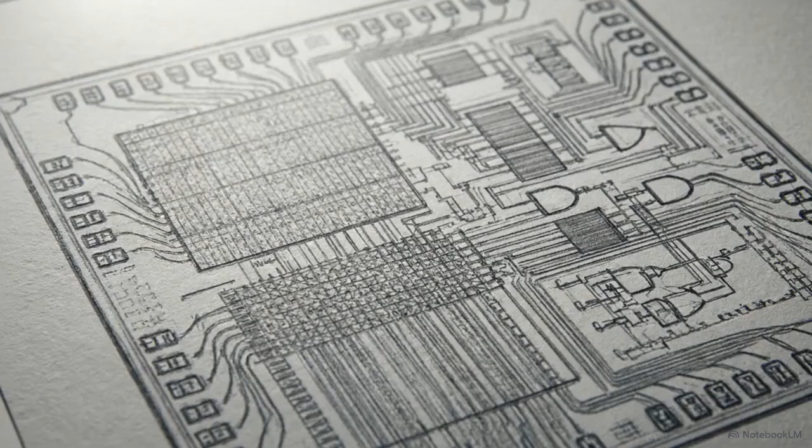Inside modern hardware, data moves at staggering speeds. Trillions of operations cycle through silicon pathways every second. But raw speed hits physical walls, bringing that momentum to a dead stop.

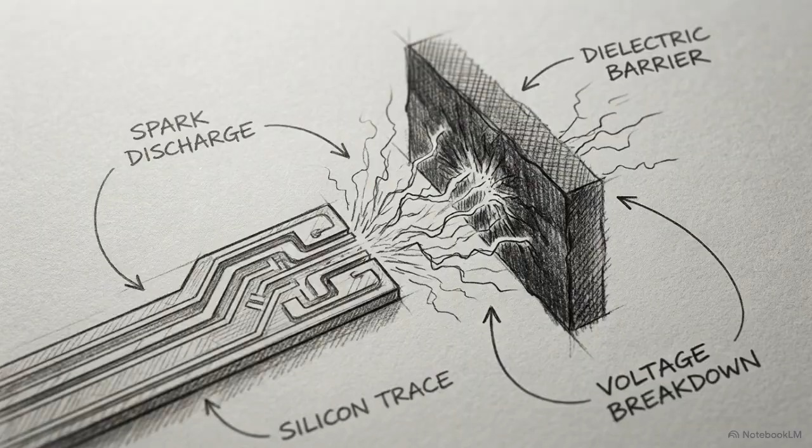In distributed computing clusters, processors have disjoint address spaces. They communicate by sending messages over a network bus. When thousands of nodes try to share data simultaneously, that bus chokes under the communication overhead.

Inside a single processor core, very long instruction word pipelines try to execute multiple operations per clock cycle. But if one instruction depends on the result of another, the pipeline stalls, wasting valuable clock cycles on empty dependencies.

Then there are SIMD vector registers, designed to process contiguous blocks of memory all at once. If that data isn't perfectly aligned to the strict physical boundaries of the hardware, the entire operation faults.

Finally, there is memory latency. A CPU cache sits completely idle, starving for data to arrive from main memory, because the physical distance simply takes too long to traverse. To a systems programmer, network routing, instruction scheduling, memory alignment, and cache latency each demands its own specialized toolset and optimization strategy.

But an optimizing compiler does not see the physical wires. It does not see the network, the registers, or the silicon cache. To the compiler, these four separate physical bottlenecks are the exact same mathematical problem. They are all resolved by a single framework, the Affine Access Function.

This equation translates the execution of loops and array references into a multidimensional geometric space. An array access is considered affine if its index is a linear combination of the surrounding loop variables. It maps a specific point in an n-dimensional iteration space directly to a specific memory location in the data space.

This theory was originally developed to parallelize code for shared memory symmetric multiprocessors. Today, it acts as a universal engine, calculating the exact spatial and temporal coordinates needed to optimize distributed clusters, instruction pipelines, vector units, and prefetch controllers alike.

Consider a message-passing distributed cluster or a non-uniform memory access architecture. These machines connect independent processors, each with its own local memory, across a larger network. If every processor attempts to share all of its data constantly, the sheer volume of traffic overwhelms the interconnect bus. The communication cost quickly exceeds the benefit of computing in parallel.

The compiler must prevent this traffic jam. Its goal is to carve out large, mathematically independent blocks of computation and assign them to specific processor IDs, minimizing the need for network communication. It does this by using affine partitions.

The compiler takes the entire multidimensional iteration space of a program and mathematically slices it, mapping distinct iterations to separate physical processors. To figure out which data each partition needs, the compiler uses a technique called projection. It takes the mathematical loop limits and projects them directly onto the array access function. This calculation pinpoints the isolated subsection of an array that a single processor will touch.

Every processor receives only the bounds of the data it explicitly requires. Where those data requirements overlap between processors, the compiler automatically generates explicit send and receive instructions at the exact boundaries of the partitions. Unnecessary network traffic is now completely eliminated.

That alone solves the macro-scale routing problem, but the exact same math applies when we zoom in to the microscopic scale of a single execution core. Modern execution cores, like the Intel Itanium 2, utilize very long instruction word and superscalar architectures. These processors issue multiple operations simultaneously within a single clock cycle.

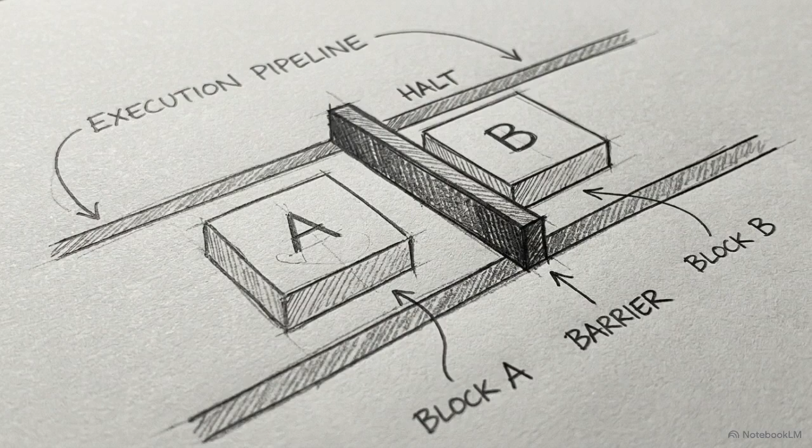Their performance is strictly limited by data-dependent cycles. If instruction B requires the output of instruction A, B must wait.

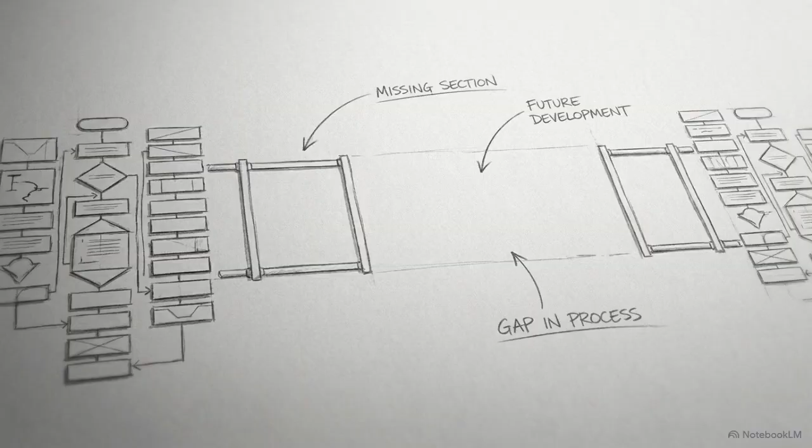This delay creates an execution bubble, an empty gap where the hardware does absolutely nothing. To eliminate these bubbles, the compiler applies loop permutation, swapping the axes of the iteration space. This pushes independent iterations into the innermost loop, shattering precedence cycles. The compiler continuously feeds the VLIW pipeline, leaving no empty cycles.

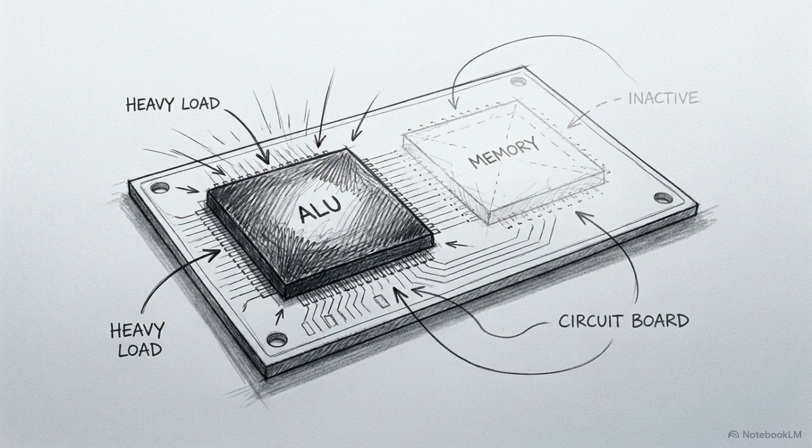Even without dependencies, a pipeline can stall if resource usage is unbalanced. That is where another affine primitive comes in, loop fusion. If one loop heavily taxes the arithmetic logic unit, and another loop only performs memory loads, the compiler fuses their mathematical domains together. Now, the processor uses its computational units and its memory units simultaneously, maximizing hardware utilization.

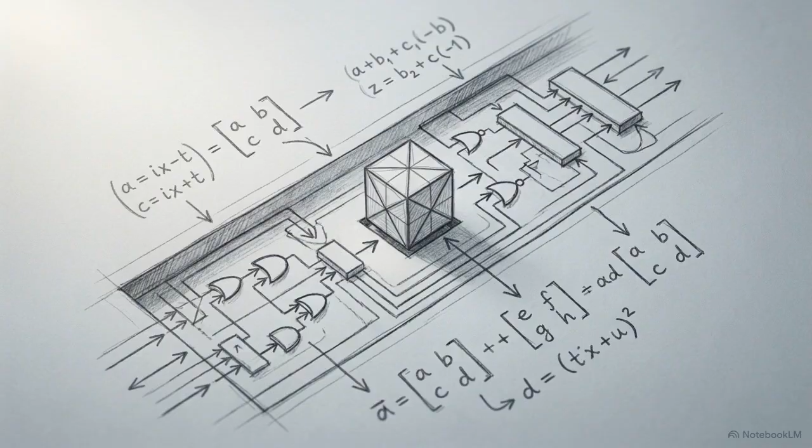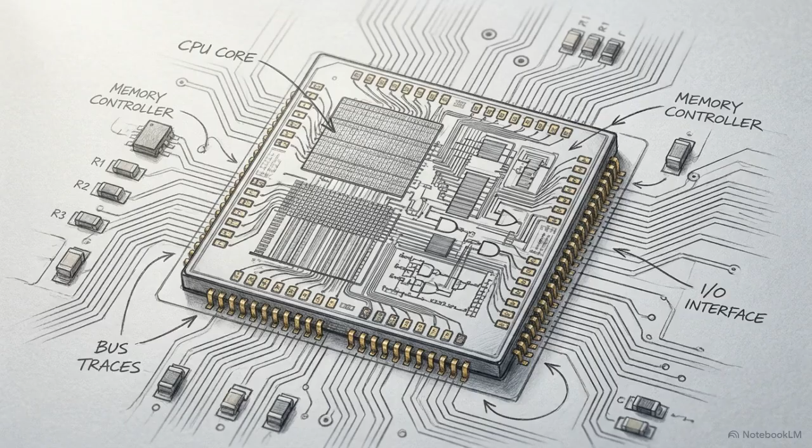Routing data packets across 1,000 separate nodes, or scheduling instructions in a nanosecond pipeline, two vastly different physical realities, governed entirely by reshaping the geometry of the iteration space. This geometric approach also solves the physical constraints of data alignment. In early supercomputers, vector instructions fetched data serially, overlapping computations on massive specialized hardware. Today, that architecture has been miniaturized.

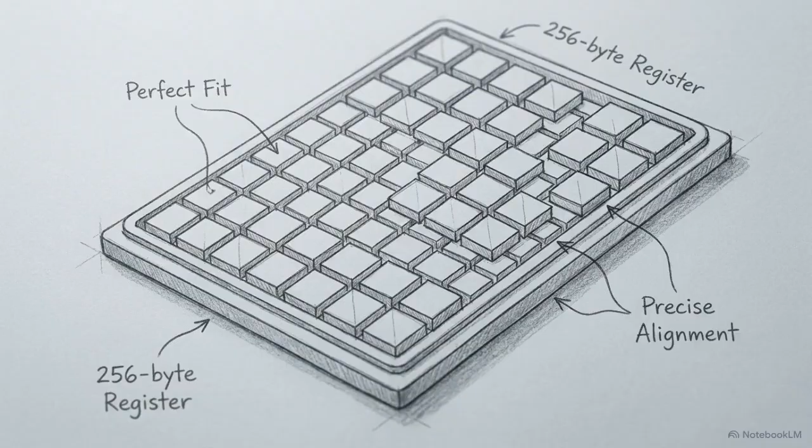High-performance microprocessors use specialized SIMD registers to apply those same vector concepts directly at the chip level. SIMD stands for Single Instruction, Multiple Data. It allows a processor to issue one instruction and simultaneously apply it to a wide, contiguous swath of memory locations. But this hardware is physically rigid. It requires perfect alignment in memory. If misaligned, the instruction simply fails.

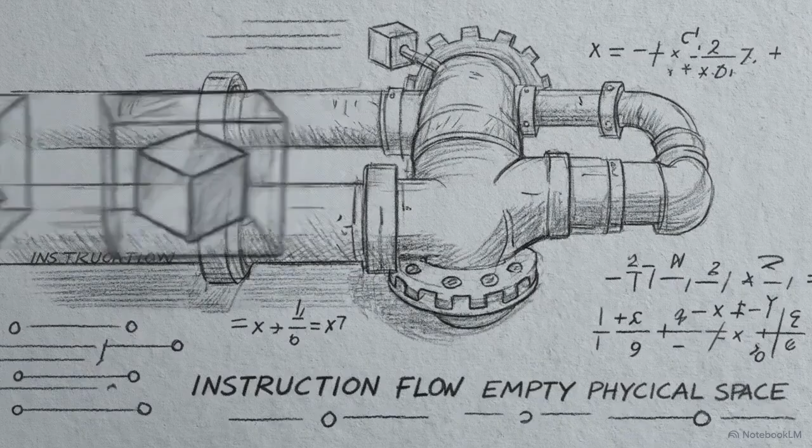The compiler enforces this alignment using strip mining, segmenting the iteration space into blocks that match the SIMD register's exact width. For unaligned edge elements, it creates a specialized prologue and epilogue loop, allowing the main loop to execute safely on perfectly aligned blocks. With the vectors aligned and the pipeline fed, the processor faces its final and most severe physical bottleneck, memory latency. No data locality optimization can eliminate all memory accesses.

When a processor requests data not in its local cache, it suffers a cache miss. The processor halts completely, wasting hundreds of cycles waiting for data from main memory. Processors have prefetch instructions to load data in advance, but guessing is a very dangerous game. Fetching data too early displaces critical information already residing in the cache, causing even more delays.

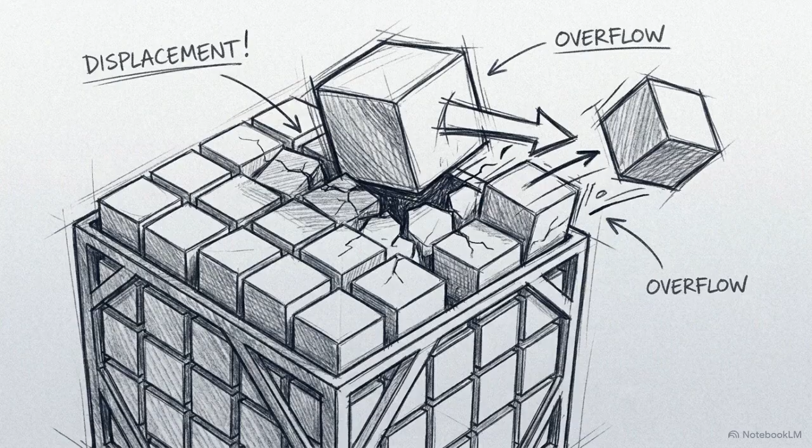To hide this latency, the compiler relies on affine reuse analysis. It acts as a mathematical crystal ball. By analyzing the null space of the access matrix, the compiler maps the exact temporal and spatial coordinates of the data. It calculates the precise iteration where a cache miss is guaranteed to occur. Knowing the future, the compiler uses software pipelining to schedule prefetching with perfect timing. While executing iteration I, it dispatches a request for iteration I+6. The fetched data drops into the cache exactly when requested, completely hiding the latency.

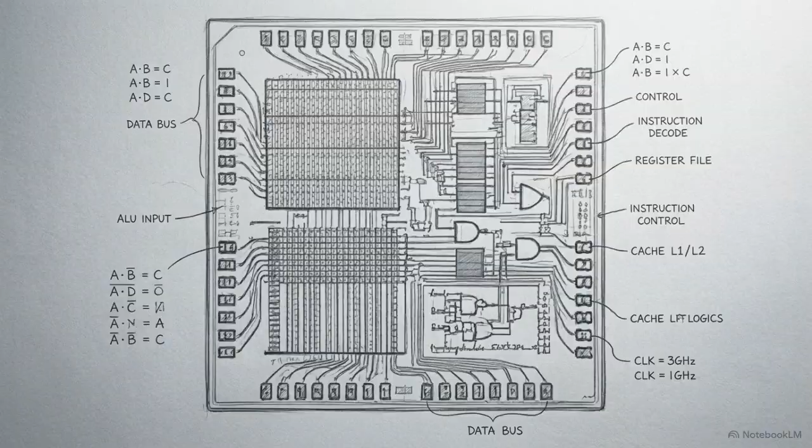By utilizing affine transformations, the compiler manipulates space for SIMD alignment and orchestrates time for cache prefetching, ensuring the hardware is constantly fed. We've looked at networked server nodes, at VLIW pipelines, wide SIMD registers, and physical cache latency. Yet the optimizing compiler is entirely blind to these physical constructs. It knows nothing of wires, buses, or silicon structures.

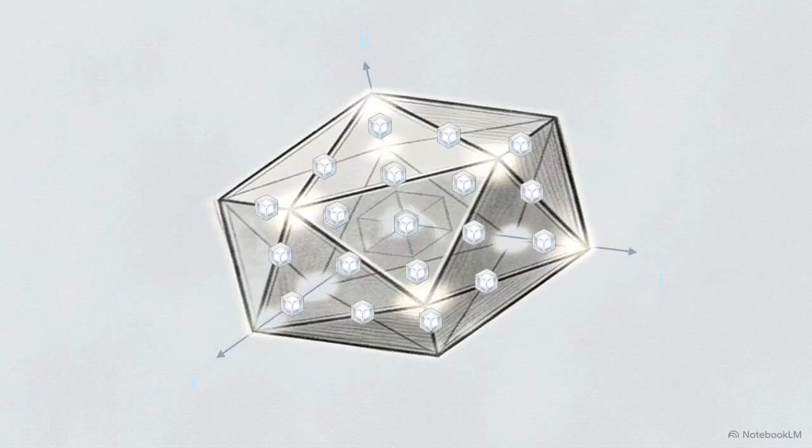Instead, it models the execution of a program as a multidimensional polyhedron. Every loop, every variable, and every memory access exists as a coordinate within that mathematical iteration space. Manipulating the boundaries of that polyhedron using linear, affine transformations is the true engine of software optimization. Whether the engineering objective is improving spatial locality for memory, ensuring temporal locality for cache reuse, or extracting raw parallelism for a supercomputer, the underlying math remains identical. True execution speed requires hardware to move data, but achieving that speed is a geometry problem.